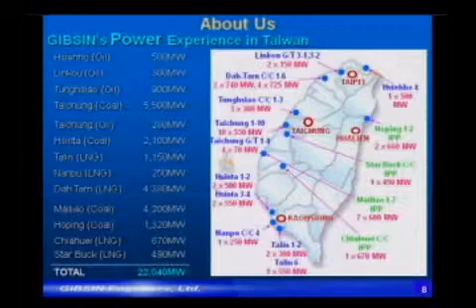GIBSIN has designed more than 22,000 megawatts of power plants and accounted for 75% of the total installed fossil power generation capacity in Taiwan. GIBSIN is an ISO 9000 certified consultant engineer.

We can play many roles to meet our clients' requirements. First of all, we can serve as architect engineer, or AE, for owners. The following are major projects we completed as owner's AE. Let us introduce our experience of coal-fired power plants first.

The Taichung coal-fired power plant is located in central Taiwan, consisting of 10 units with a total capacity of 5,500 megawatts. This plant was constructed in 3 stages. Units 1 to 4 were constructed at stage 1, units 5 to 8 at stage 2, and units 9 and 10 at stage 3.

GIBSIN participated in this project from the very beginning, while Tai Power just started land reclamation. The Taichung project is executed by component basis. GIBSIN has to prepare all specifications and drawings for Tai Power to procure equipment and tender for contractors. The Taichung plant is the largest coal-fired power plant in the world.

The Mailiao supercritical power plant is located in central Taiwan. It has 7 units with a total capacity of 4,200 megawatts. The plant is one of the largest supercritical power plants in the world. Among 7 units, major equipment of each unit was procured from different manufacturers. GIBSIN has to integrate equipment from different vendors to make this a successful project.

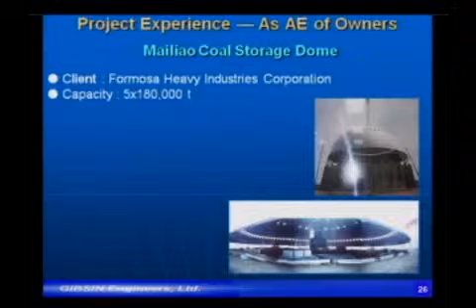During the engineering stage, computer simulation and calculation were carried out to evaluate settlement under different storage conditions, as well as the interaction among adjacent domes. This is the pioneer project of coal domes in Taiwan.

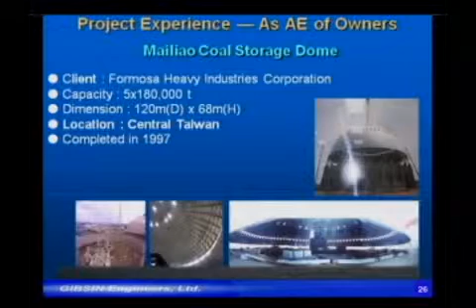GIBSIN can also act as designer for major equipment vendors. For instance, we have been working with Alstom since 1997. The list shows that GIBSIN has been working with Alstom for no less than 8 international power projects.

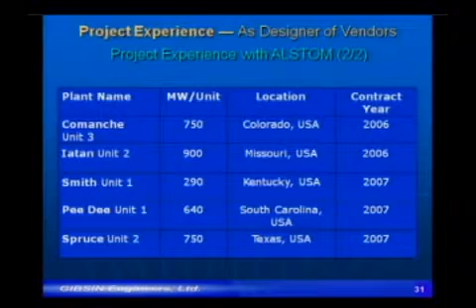This is the Smith Unit 1 project, located in Kentucky, USA. GIBSIN provided detailed structural design to Alstom for the boiler structure.

This is the Huayang CP1 project, located in Fujian, China. GIBSIN provided extensive engineering services of Units 5 and 6 Boiler Island to Formosa Heavy Industries Corporation.

The Panay cogeneration plant is located in the Philippines. The dual-fuel boiler is designed to burn both coal and recycled waste.

GIBSIN can also act as engineer for EPC contractors. Starbuck Combined Cycle Power Plant is located in central Taiwan with a 2-on-1 configuration and a capacity of 490 megawatts. This plant was completed for commercial operation in June 2009.

This is the only project done by the Taiwan EPC team, and GIBSIN provided full engineering and design services to the EPC contractor. GIBSIN's scope of services includes basic and detailed design, specification preparation, and bid evaluation. GIBSIN also prepared systems description documents, bill of materials, reviewed vendors' drawings, and integrated all engineering and design work.

GIBSIN is the most experienced power consultant in Taiwan. GIBSIN has been accumulating extensive experience for the engineering and design of power plants. GIBSIN's capabilities cover basic engineering, detailed design, procurement expediting, inspection, witness of equipment, and integrating all engineering and design work.

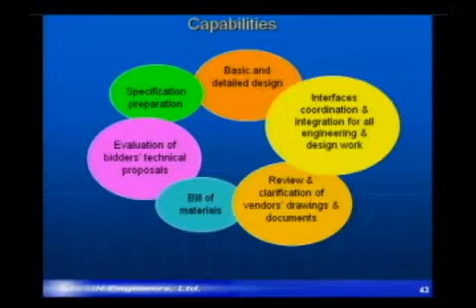GIBSIN's extensive experience helps our clients reduce project capital cost and shorten project construction schedules. We always keep effective and constructive communication with our clients. We use 3D CAD intensively.

The following sample shows a 3D model in the turbine building of a coal-fired power plant. This drawing shows electrical cable trays surrounding a turbine generator. The equipment and piping were added.

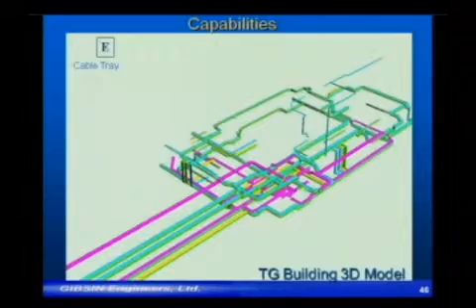The turbine building structure is modeled. Cable trays, piping, structure, and equipment are all in one 3D model. This close-up shows cable trays, piping, structure, and equipment in a turbine building.

The following is a dynamic 3D model of the Star Buck combined cycle power plant.

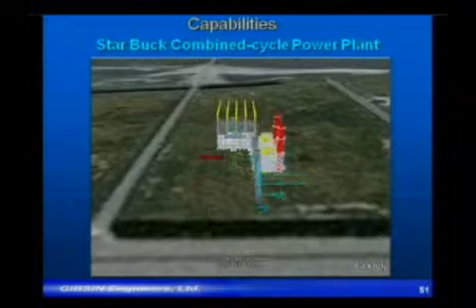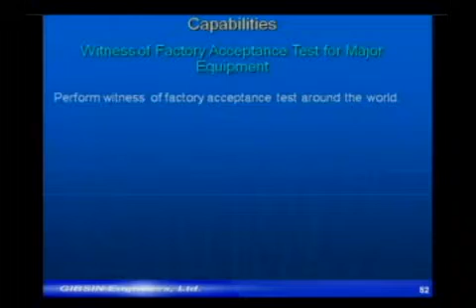GIBSIN dispatched engineers as customers' representatives to perform witness of factory acceptance tests for major equipment produced by manufacturers around the world. This picture shows GIBSIN's witness for gas turbine rotor runout test and clearance inspection.

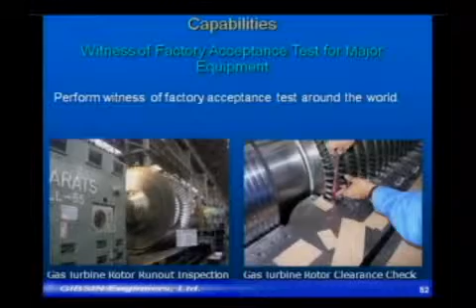We're familiar with international practice in the power industry. For over 30 years, GIBSIN has continually undertaken the engineering and design services to customers for numerous power projects. We have extensive experience working with international manufacturers around the world.

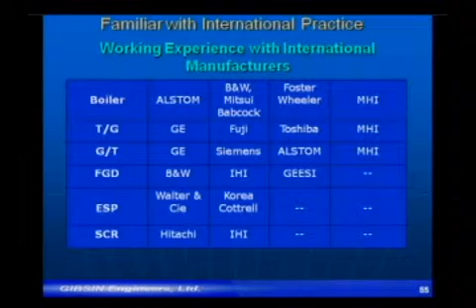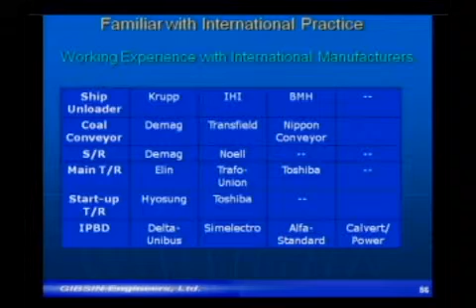The following list shows our working experience with major international equipment manufacturers. This list shows the vendors of boilers, turbine generators, gas turbines, FGDs, ESPs, and SCRs that we have worked with. This list shows vendors of ship unloaders, coal conveyors, stackers, reclaimers, transformers, and IPBDs that we have worked with. This list shows vendors of high voltage cable, UPS, DCS, and other control systems that we have worked with.

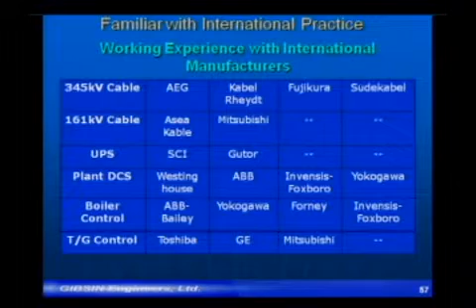We are familiar with international codes and standards. At GIBSIN, we maintain and update the latest international codes and standards. GIBSIN staff has strong bilingual capability.